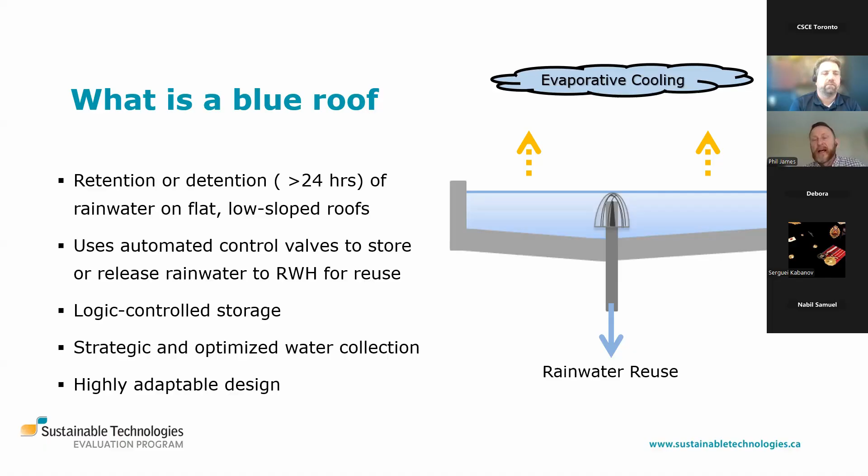Before we installed the system, once our 5,000 liter tank filled, the rest of the water bypassed and went into the storm sewer system. But with this system, we're able to keep that water on the roof and use it as we see fit. So it's a very highly adaptable design, and we're excited to share some of those results with you today.

Some high-level potential benefits of smart blue roofs that we're trying to estimate as part of this study: obviously peak flow reduction, which equates to flood reduction. What is the rainwater harvesting potential, notably for toilet flushing and irrigation? What are the evaporative cooling benefits of this type of technology when you allow that water to pond on the roof for prolonged periods during the hotter periods of the summer?

What does that mean in terms of energy savings? What does it mean in terms of water conservation, in terms of how much water we can collect and use to offset potable water? And finally, what are the utility cost savings? With stormwater charge fees, water costs, utilities, energy costs, what are those savings as a result of implementing this technology? We're going to highlight some of these benefits later on.

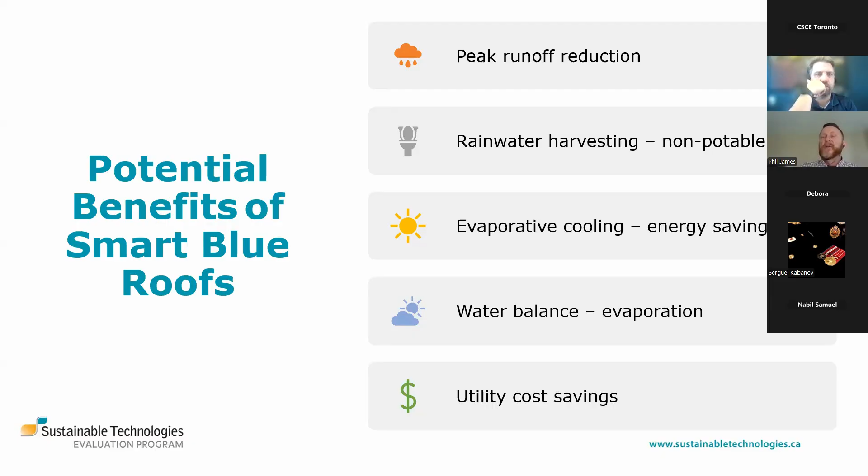First I'm going to pass it over to Kyle to talk about this Blue Roof system overview. Oh, thanks, Phil. Yeah, appreciate that.

You're looking at the head office of Credit Valley Conservation in Mississauga. We have essentially two buildings there: the building in the back, and the building in the front, which is Building A. That is where we placed our Smart Blue Roof.

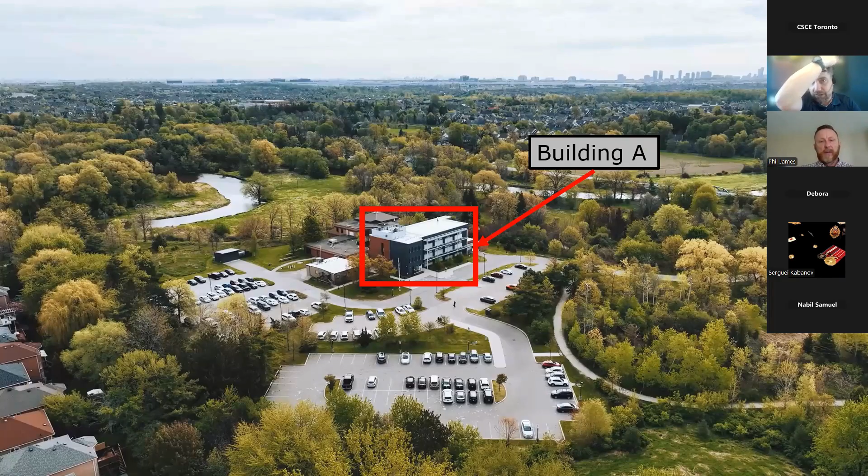You can see it's a flat roof, TPO, white TPO membrane. It was identified as the ideal location for implementing a Smart Blue Roof.

So just a closer look at Building A's rooftop. Essentially what we did is we broke our roof into two zones. Zone one is where our critical HVAC infrastructure is, where our outlet pipes are. Zone two is our blue roof zone.

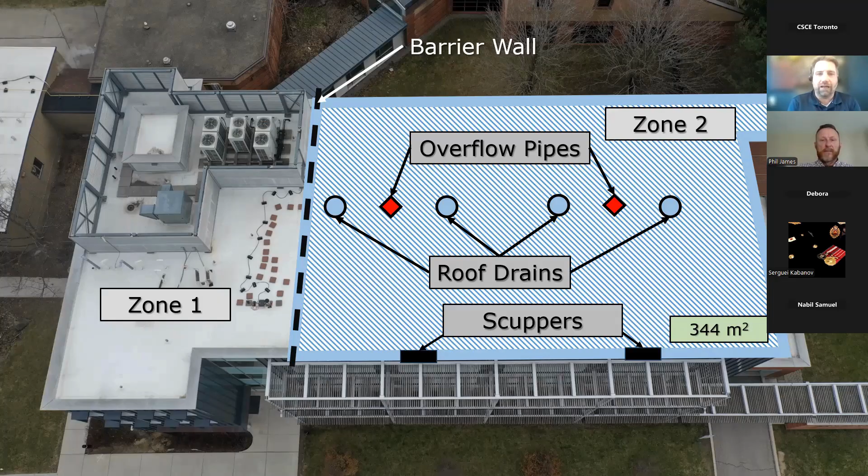Within that blue roof zone, we have 4 drains with 2 emergency overflows identified in red there. We have 2 scuppers, and the entire size of the blue roof zone is 344 meters squared. So a fairly large area that allows us to collect and store water on top of the roof.

One of the things we noted in the previous slide was a waterproof barrier wall. You can see it in the picture on the right-hand side, that barrier wall that separates zone one, protecting the critical HVAC infrastructure from water storage, and zone two on the left-hand side of that barrier wall. The picture on the left is looking out onto the blue roof zone.

There you can see our drains right there. In the picture on the left you can't really see it, but we have our monitoring infrastructure there now. Essentially this is where all of our water is being stored.

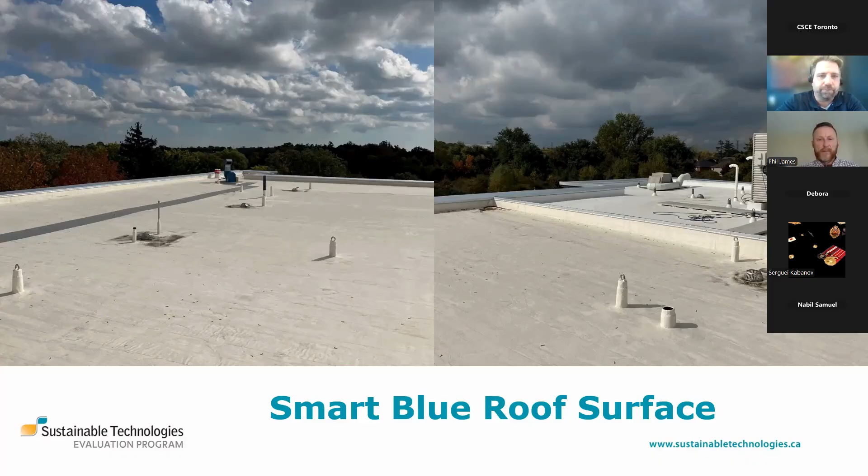One of the big considerations we had to think about was how we were going to store that water on the roof in such a way that we protect the integrity of the membrane. During construction, we originally had a TPO, white TPO membrane, and we were installing a new roof drain for our Smart Blue Roof system.

We found that underneath, once we peeled back the membrane and started getting into the insulation layers to install that new drain, the insulation layers were wet, indicating a leak in the roof membrane. That put us on a path where we had to replace the roof membrane before the blue roof became fully operational. So we had to consider our different roof membrane options as part of the design process.

We had four options: a two-ply SBS mod bit roof, a single-ply TPO roof, a single-ply PVC KEE roof, and a PMMA liquid applied roof, which is a polymethyl methacrylate acrylic resin based membrane.

So it was a liquid applied membrane. That was the identified preferred option, the PMMA liquid applied membrane, in part because it doesn't have any seams. We wanted to avoid seams because they potentially offer a weak point in the roof membrane, and because we're storing up to 25 centimeters, or 250 millimeters, of water in certain areas, that puts quite a bit of pressure on the roof membrane and could create weak points at a seam.

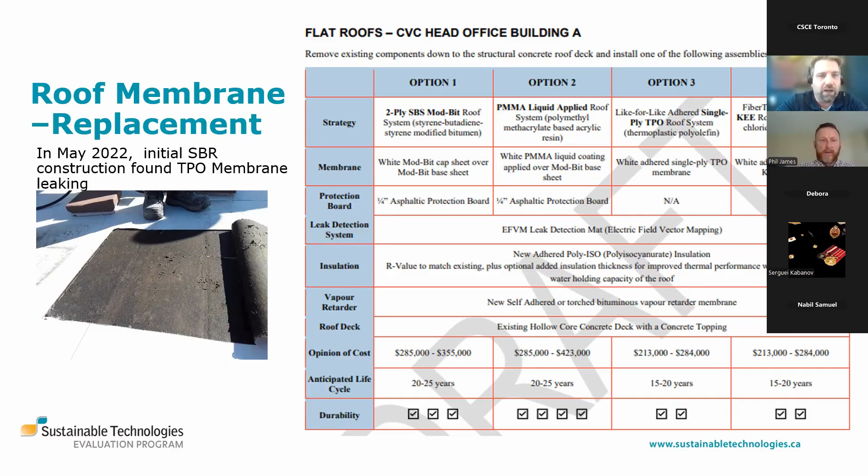We also looked at how long these roof membranes last. Option two could last up to 20 to 25 years. With option three, the TPO membrane, it only lasted to the 12-year mark. We weren't seeing leaks come through to the third floor, but it gives an indication of the lifespan of a TPO membrane, and we wanted to maximize lifespan given the conditions of storing water on that roof.

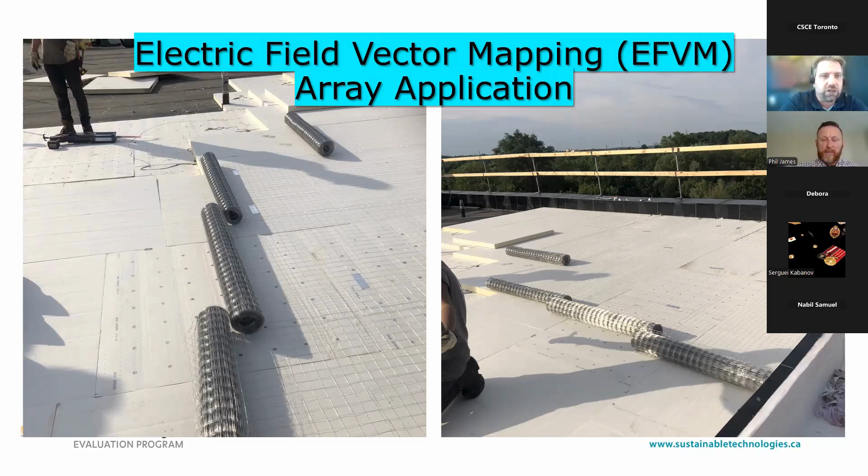Essentially, this is how the system works. We hire a company to inspect our roof membrane using the EFVM. They run a charge across the roof surface to see if that charge connects below to the steel grid. If there's a potential leak and water is getting through, that charge will come through. They're wetting the roof surface while running a low voltage charge across the membrane, and if it connects down to the steel mesh, which they're wired into, they'll read an electrical charge on their meter. If they're reading any charges, that could indicate a leak.

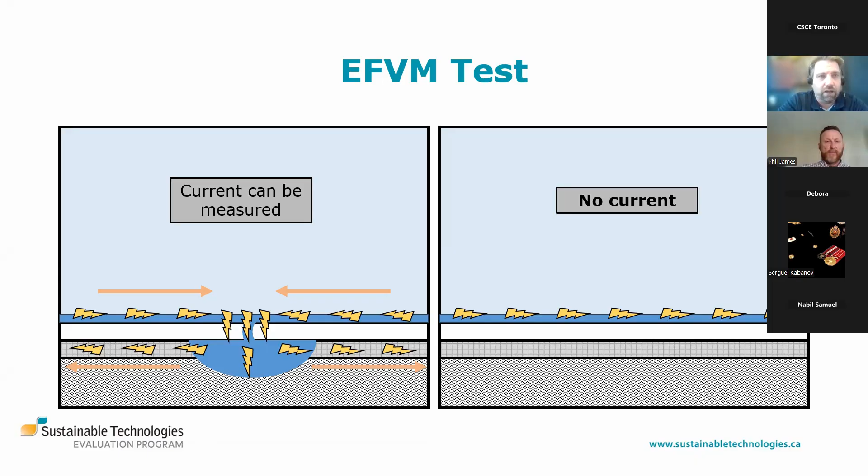Near the drains, you start seeing a charge because the water's moving down past the steel grid, but that's fine since the water's going down through the drain. If they were reading it in other areas beyond the drains, that would indicate a potential leak, and it allows us to pinpoint exactly where it is so we can reapply the PMMA liquid applied membrane, making fixes a lot quicker. We're going to run another leak detection test in November or December as part of the operations of the Smart Blue Roof.

Essentially, anytime we're storing water on the roof, because we are complying with the Ontario Building Code, which doesn't want us to have water stored for greater than 24 hours, which we are doing, and because we follow the CSA B805-18 rainwater harvesting standard, we have to mitigate our risk. So we did a water safety plan to meet that standard and address the Ontario Building Code. We had to put in a 3rd floor treatment system.

We're cycling the water between the 3rd floor treatment system and the rooftop. There's a suction line at the far drain, which pulls the water to the 3rd floor treatment system, and then pushes it onto the roof once it goes through both filters and UV light. If water is drawn into the roof, the modulating control valve opens up, and that water drains through gravity down into our basement rainwater harvesting tank, approximately 5,000 liters. Then it goes through another treatment system before being redistributed or reused to the first through 3rd floor bathrooms, where we use the water to flush the toilets.

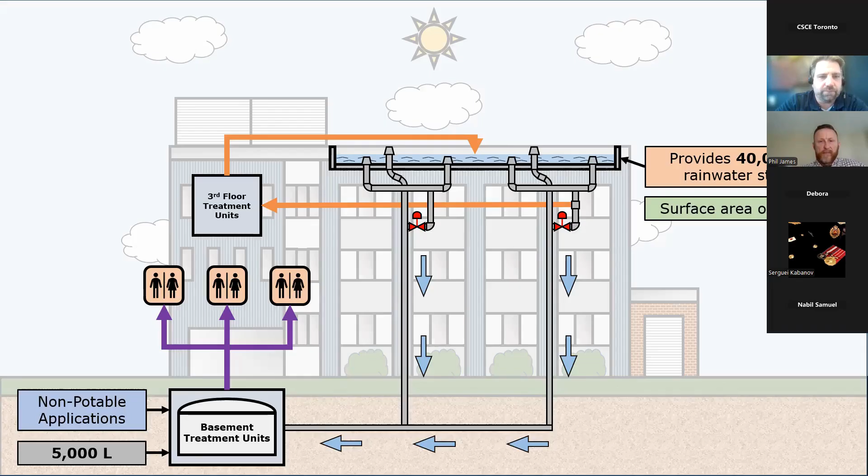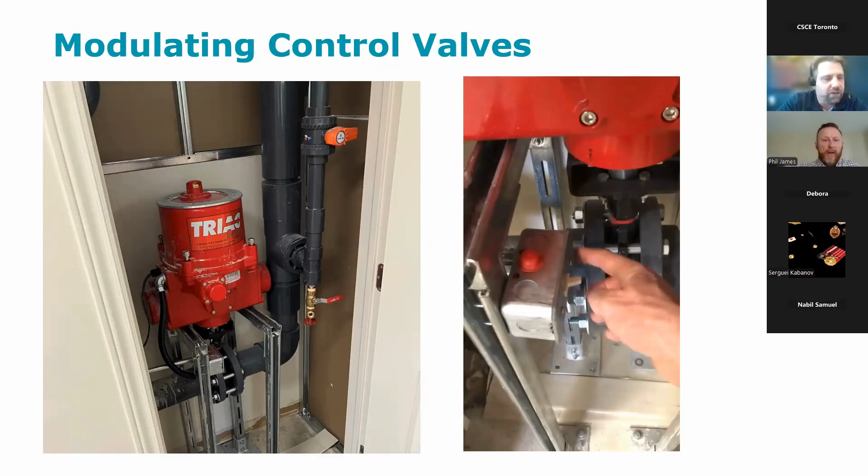We also have cleanouts. You can see there's a cleanout drain at the bottom of our suction line, and there's also another valve that allows us to open and close that suction line to do maintenance work, to clean it out, to draw the water out, etc.

We talked about adhering to the CSA rainwater harvesting standard. Our system as a whole was designed to be the first Smart Blue Roof to meet that rainwater harvesting standard. As a requirement of that, we had to do a water safety plan. Part of that plan was to understand that we're storing water on the roof, and there's a chance for bacteria to grow within that water, and what are the risks to the people that water may have contact with.

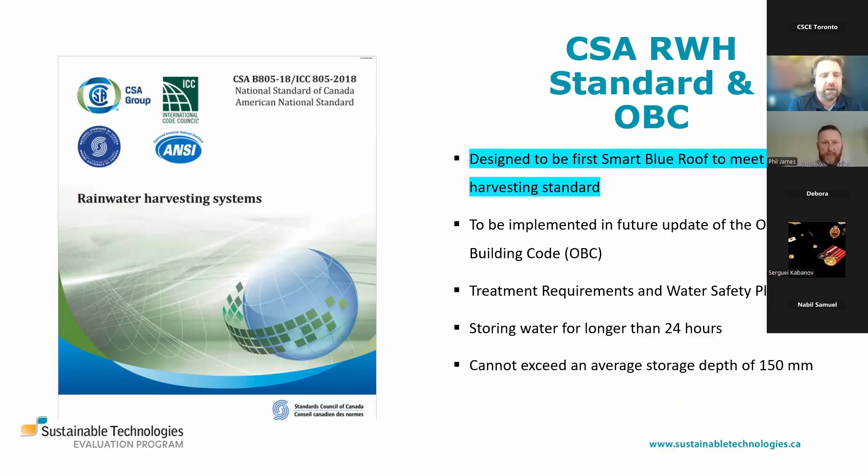Given that we are an office space, there's potential for staff to come in contact with that water through aerosols, and also through toilet flushing. So what does that mean? We have to have some kind of interventions, and that's what the CSA standard identifies: what type of interventions do you need? Is it just mechanical filter? Mechanical filter and UV light? Mechanical filter, UV light, and chemical treatment through chlorine? It lays out that standard based on the identified risk. For us, it required both mechanical filter and UV light, and I think we added chlorine on top of that as an additional cautionary procedure.

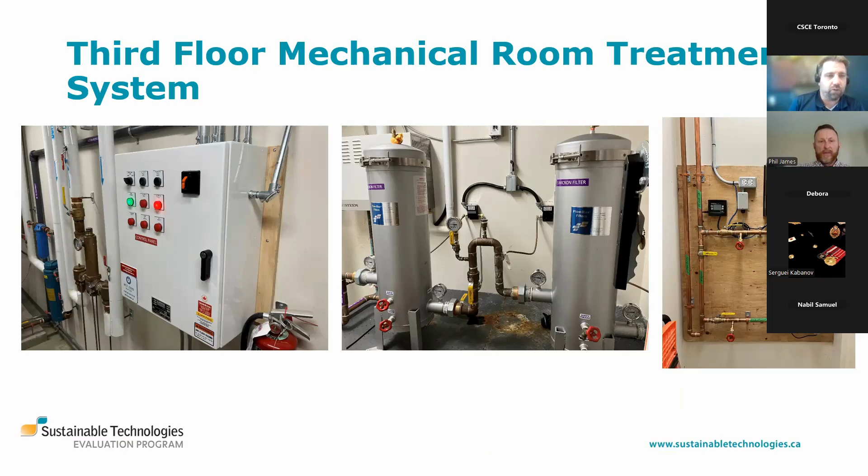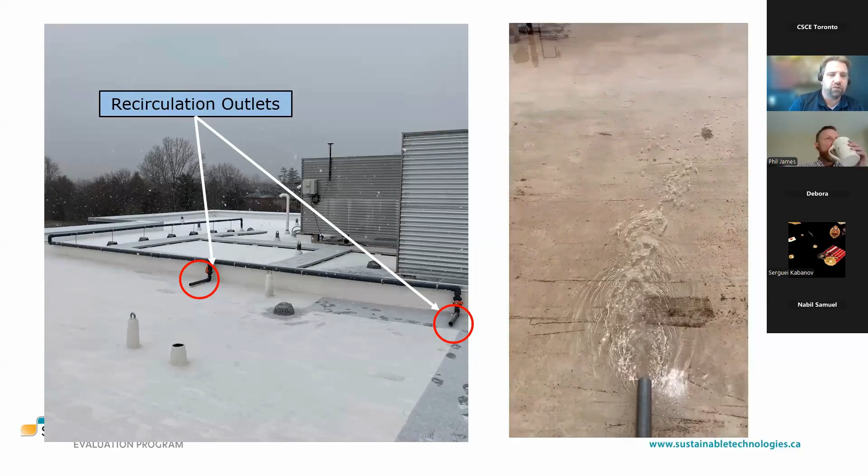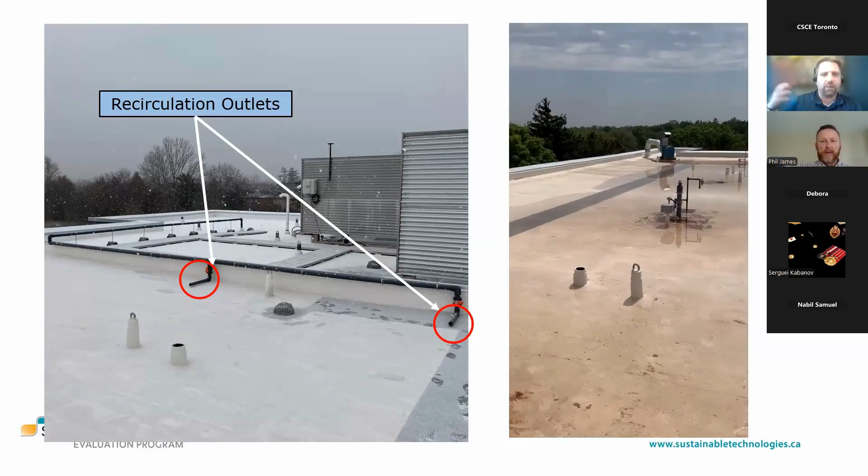So once that water is cycled through those mechanical filters and through the UV light, then that water is pumped back onto the roof. We have two outlets essentially. That's how our system moves the water from the rooftop down through the floor and then back onto the roof. We've looked at ways of improving that circulation so the water is stirred up and mixes better, and we're looking at other ways to do that as well.

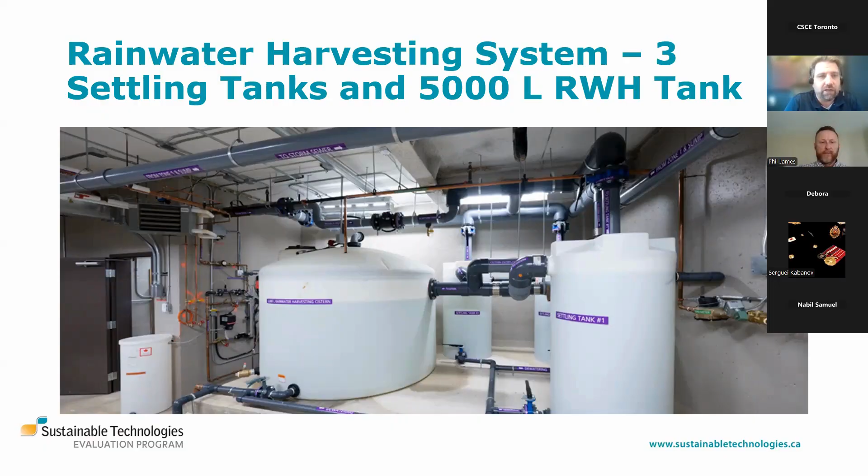It goes over top of the main rainwater harvesting tank, and then makes its way into, you can see in the picture, settling tank number 1, the tank in the front. We have 3 of those settling tanks, allowing for primary treatment so any grit, dirt, or organic matter can settle out of the water before it's moved into our main storage reservoir. Each of those settling tanks is about 1,000 liters, and our main storage reservoir is 5,000 liters.

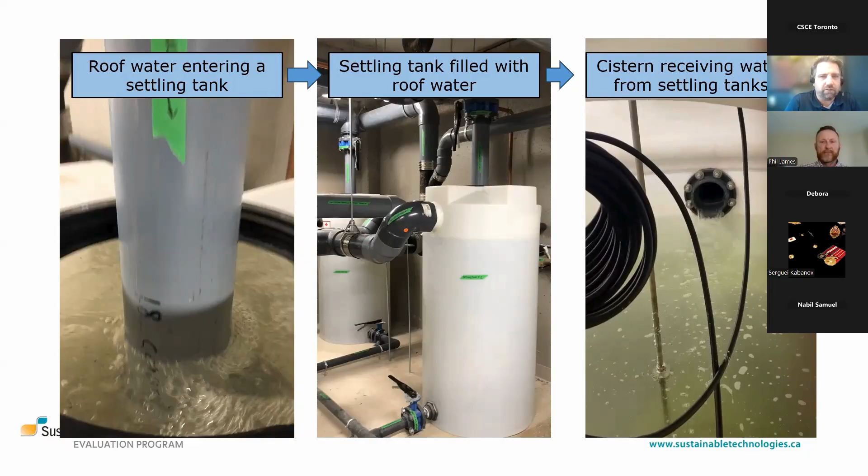So once we go from the settling tank, it goes first into a 100 micrometer Judo filter, which is a self-cleaning filter that's really handy because it does maintenance on its own to keep it clean. Then it goes through a pump system, and then through a 5 micron filter after the Judo.

Then it goes back through a UV light system, and then into an agitator. At the point of the agitator, we actually add in a chlorine solution - you can see the chlorine pump, it's a peristaltic pump that adds a certain volume of chlorine and water mix into the system as it's being agitated. Then it comes back up and out into our gray water line, which is used for flushing toilets.

One of the things we've learned here is figuring out how much to pressurize the line, because we're in the basement but have to move the water not just to the first floor, but the second and third floor. We have to have enough pressure at the toilets to make sure they flush properly, but we've had to be really cognizant of how much pressure we can put into the system.

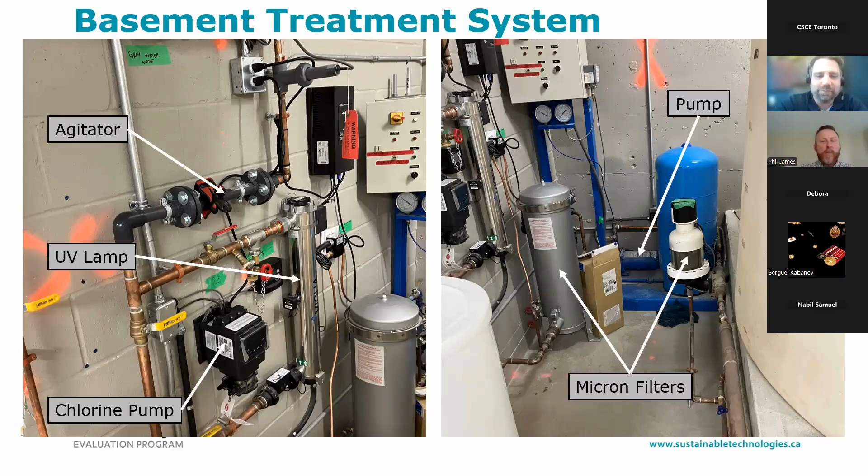Next slide. Oh yeah.

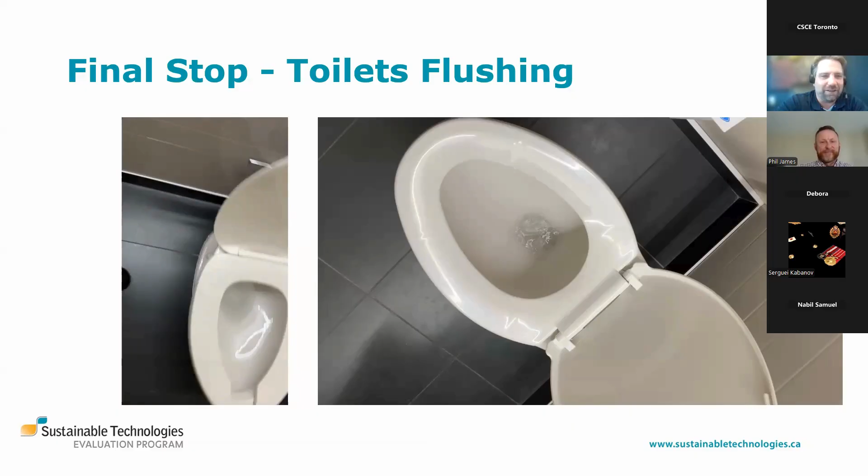So this is always a good check for us - okay, do we have enough power? It's kind of funny, I never thought this is what we'd be focusing on, but it becomes critically important in operations, because if it's not flushing properly, you're going to have issues with your colleagues.

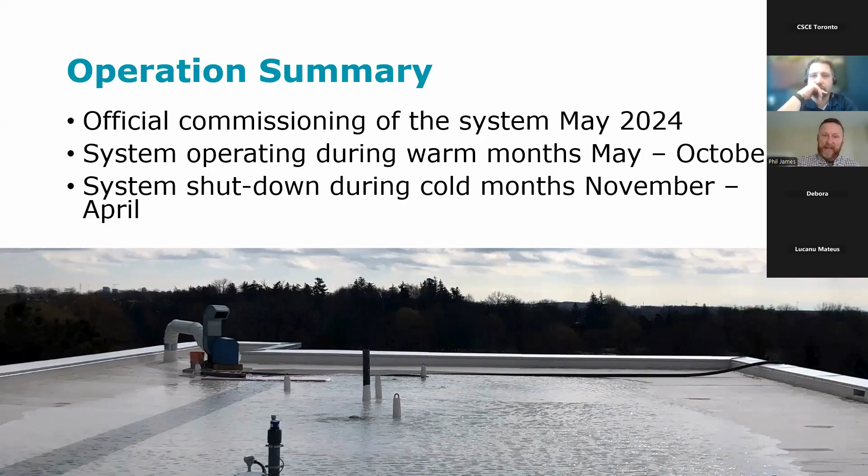From the operation perspective, we started this system in May of 2024. Per our building permit, the system operates during the warm months, May 1st to October 31st, and during the cold winter months the system is shut down. We still harvest rainwater - it moves from an active system to more of a passive system. Next slide.

So as Kyle was talking about, we have a programmable logic controller, and this is really the brains of the system. You have inputs like temperature sensors and water level sensors, and you have outputs such as controls to open and close valves, to turn pumps off and on.

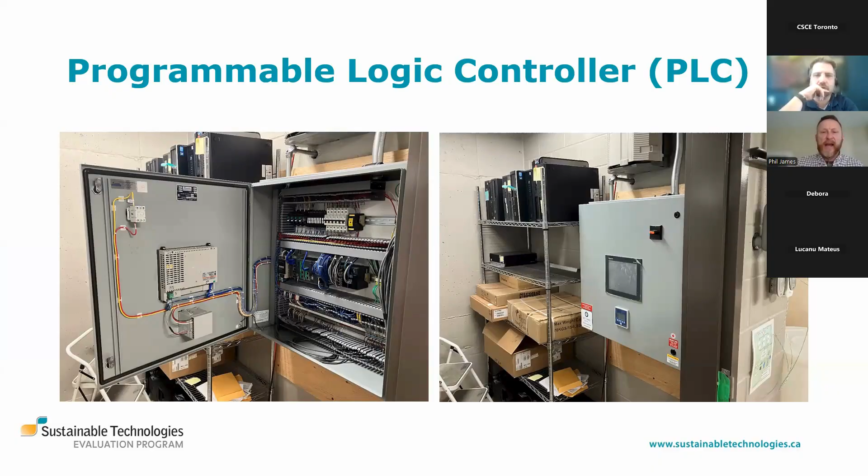If you go to the next slide, there's a schematic that shows this. The PLC, again, is the brains. The sensors on the roof that measure temperature and water level tell the PLC how much water is on the roof, how much water is in the tank, and whether we want to fill up the tank. If so, the PLC will open the valves, which gently allow that water to come down into the tank. Then the water level sensor will tell the PLC in real time, okay, I'm full, close the valves and keep the rest of the water on the roof. So that logic system is really powerful in terms of adaptable, optimized infrastructure.

Another component to this is the data, which is collected on a 5-minute time step and sent into a data sphere. From the data sphere, it's sent into a WISKI database. We can take all that data collected on a 5-minute time step and calculate key performance indicators, because trying to manage this data in Excel is impossible due to the size of the file. Working with a database like WISKI gives us the ability to manipulate and work with the data and calculate some of the key performance indicators.

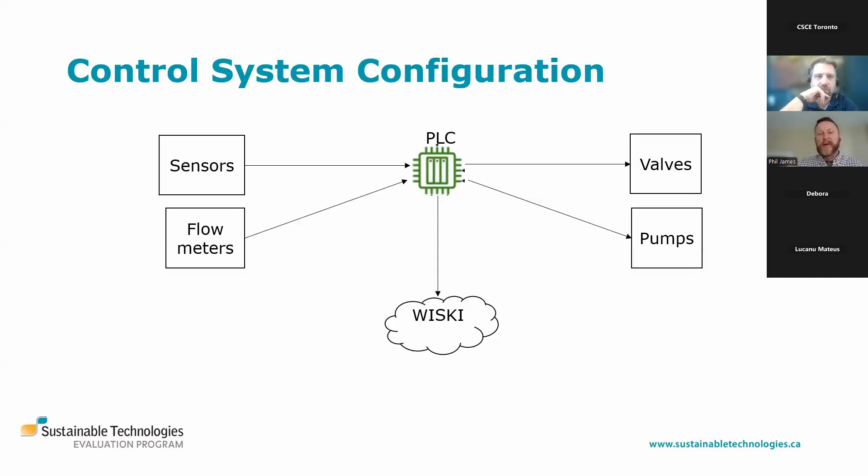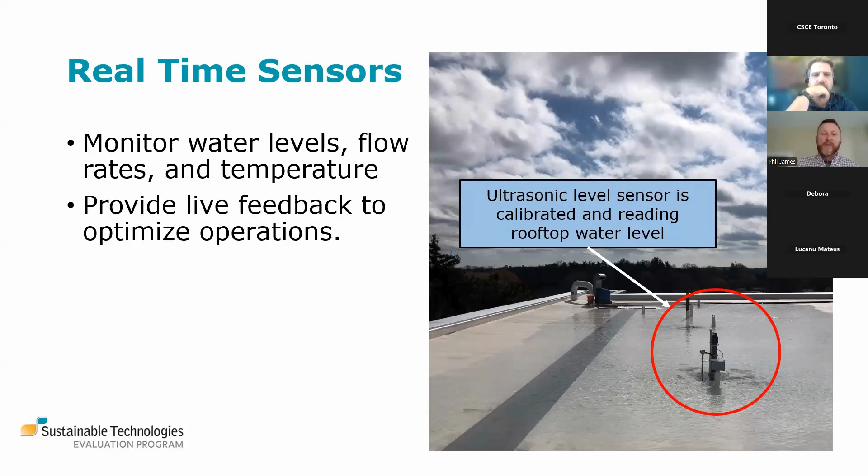Next slide. This is an example of an input, an ultrasonic level sensor that's constantly measuring water levels on the roof, water levels in the tank, and temperatures of the roof membrane, and even temperatures underneath the concrete slab core roof, to understand what the temperature differential is during different times of the day, weeks, and months.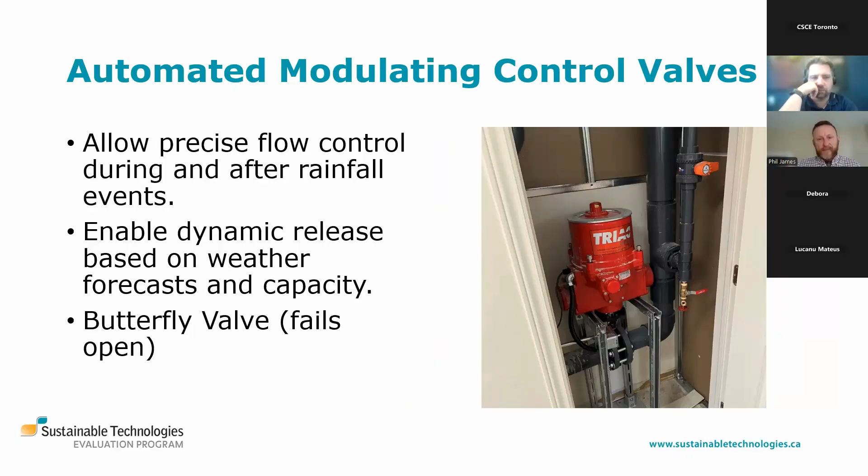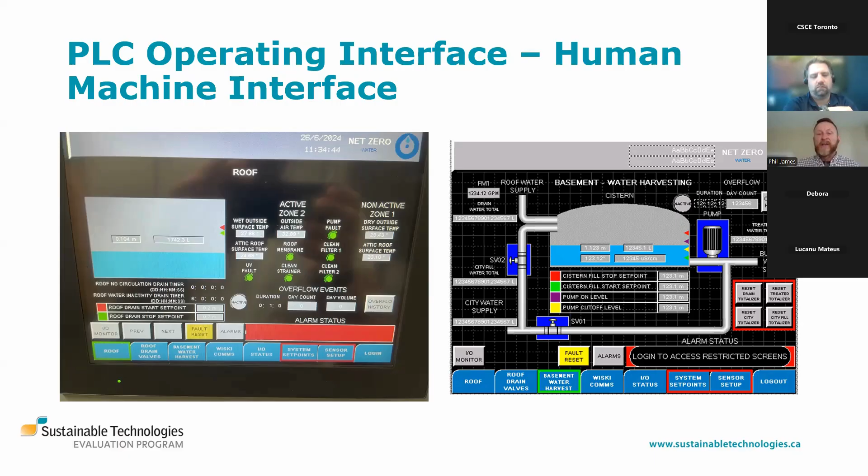Next slide. This is the human machine interface on the PLC. On the left is the roof dashboard, showing inputs like water level on the roof and other inputs such as temperature. You can see active zone 2, non active zone 1, outside air temperature, attic roof temperature. These are live dashboards showing real-time information coming into the PLC. On the right is an example of inputs and outputs, telling you what pumps are running, what valves are open and closed. The human machine interface is a great piece of equipment because it gives you a snapshot of what the system's doing, and tells you what the alerts are or things you might need to change if there are faults.

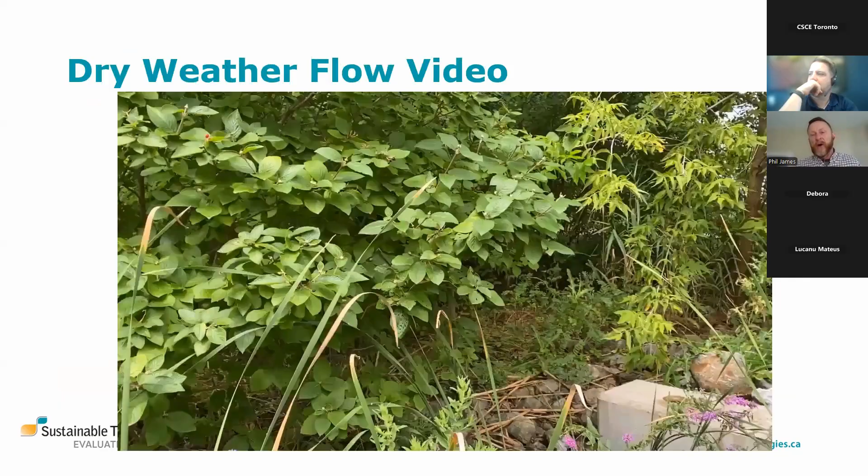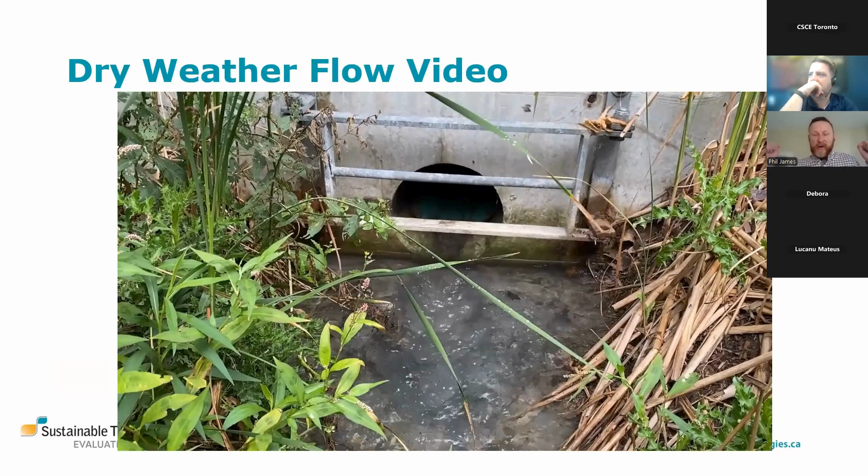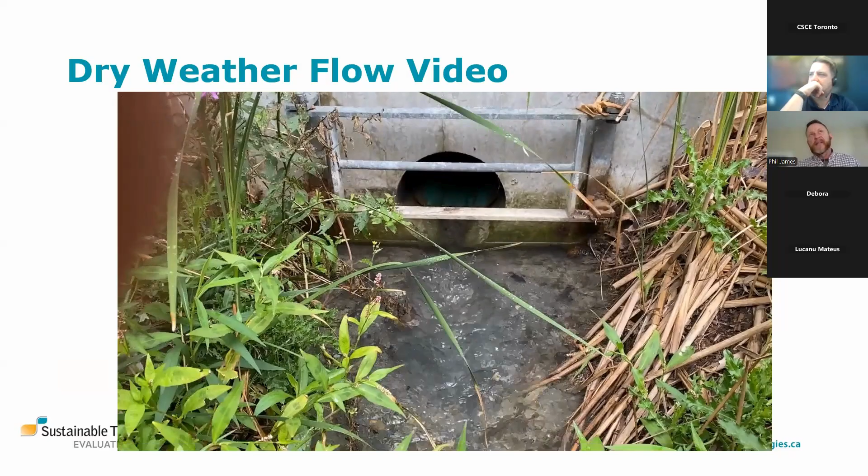Next slide. This might be the video of the dry weather release. This shows those modulating control valves when they're open, allowing water to be released as dry weather flow. Here the valves might be maybe 5 or 10% open, but you can see that gentle release of water into the storm sewer system. It's not a surge or a massive amount of water at once. We can allow it to trickle and almost replicate a base flow from a wetland. It's a really great advantage, because in some cases you can release water over a period of an hour or two, gently releasing it into the adjacent storm sewer system.

Next slide. I've already touched on cost. I think I'll move into the public health results, Kyle, since we only have 15 minutes.

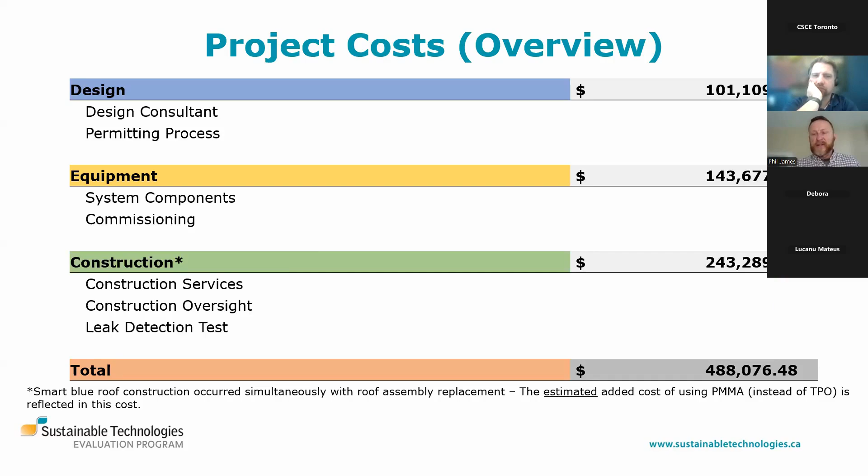Yeah, so we did conduct some public health research. There hasn't been a lot of public health research done in relation to stormwater management features. We've touched on the fringe of it, like what are the benefits of green infrastructure to general populations. With COVID, access to green space became very important. But we haven't looked at what are the bacterial levels, what is the associated risk. When you look at water quality criteria, there's the enhanced water quality treatment from MECP.

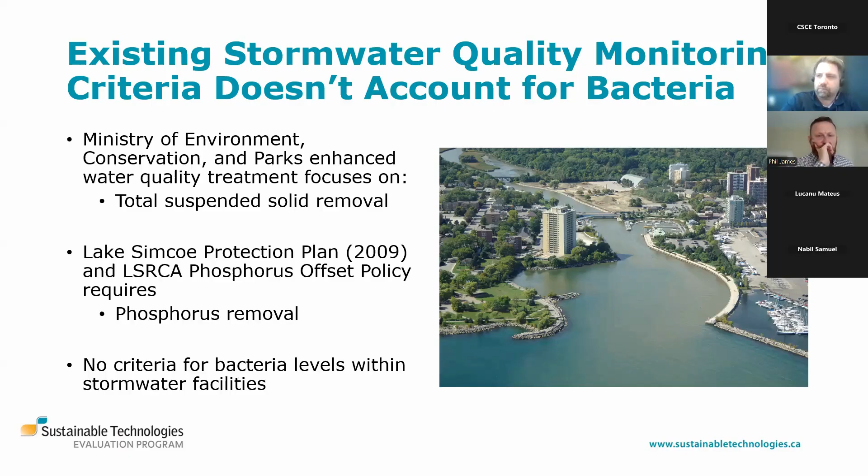So what were some of the drivers? Well, for public health monitoring, really they're unknown. For storing rooftop water, we knew bacteria would grow on the roof if we were storing water on it, but we didn't know what type of bacteria, how much, what the bacterial counts would be.

And we were one of the first smart blue roofs in Canada. There's only two known smart blue roofs, one that exists in Elmira, done by our design consultant on their own roof, and then we have ours in Mississauga.

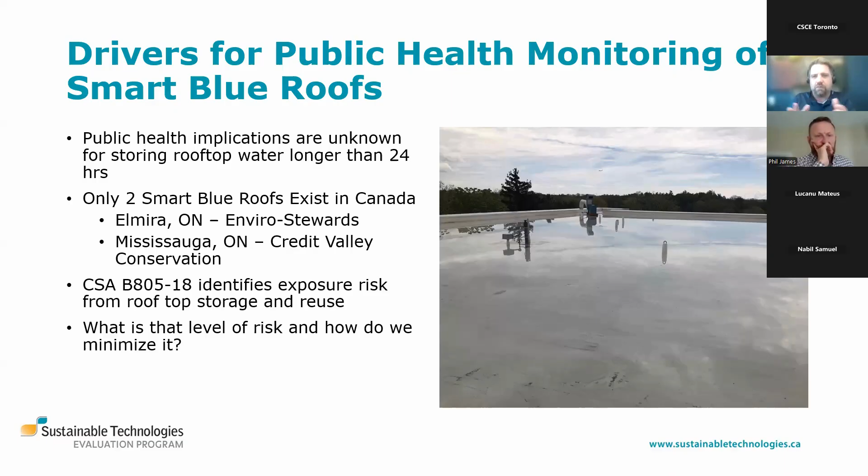And as I noted before, meeting that rainwater harvesting standard that CSA produced identifies exposure risk from rooftop storage and reuse. But what exactly is that? Are we creating some level of risk when we're just leaving water stored on the rooftop without receiving any form of treatment or intervention?

And so, as I noted before, we have a relationship with Toronto Metropolitan University. This is Dima Balaa, she is a PhD student in public health, and she put forward a design for a monitoring program that would measure bacteria levels on the rooftop.

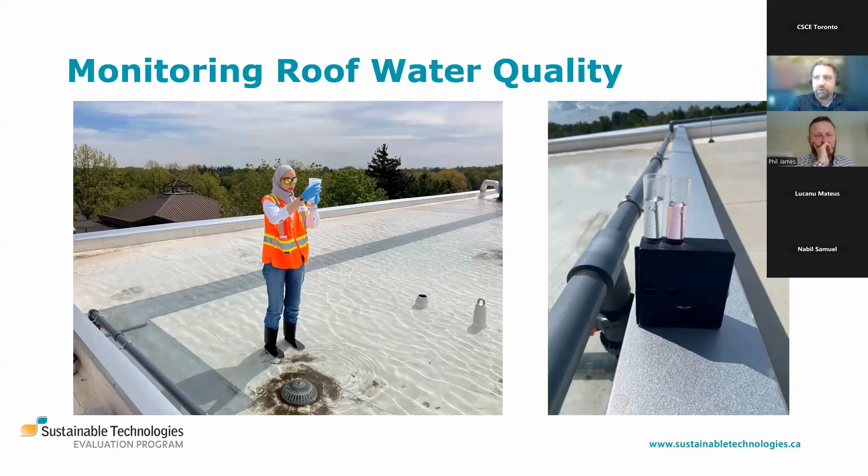The ones that we were focusing on in particular were E. coli and Legionella, and we'll also show total bacterial counts in terms of what we were seeing on top of the roof.

This was also selected based on, why did we focus on E. coli? Well, E. coli are often used for public beaches, and they also have requirements for irrigation. So we wanted to see where our levels were at and how our mitigation factors would impact fecal coliform levels.

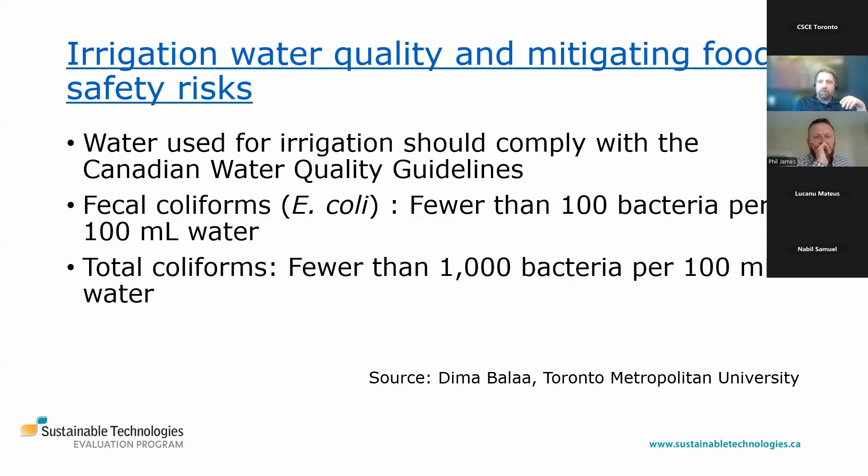So when you're thinking about irrigation, you should have fewer than 100 bacteria per 100 milliliters of water. In terms of total coliforms, you should have fewer than 1,000 bacteria per 100 milliliters of water. So there's some criteria, but it doesn't necessarily fit in terms of stormwater management.

Other things we could look at are BOD, TSS, turbidity, again E. coli, and total chlorine residual. This was particularly for toilet flushing and urinal flushing within our office space. What should our levels be?

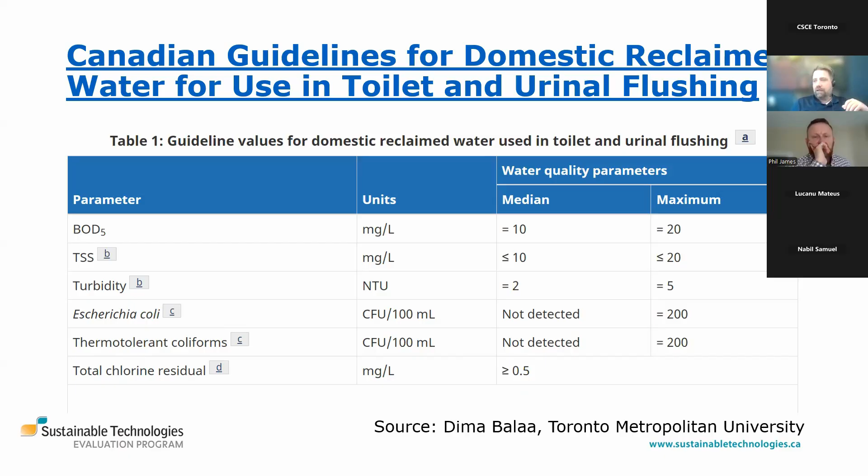So we knew that we had to have, at least for our basement treatment, a residual of 0.5 milligrams or greater, essentially, in terms of chlorine residual within our pipe system.

Legionella, again, it depends. What Dima explained to CVC and to us was the fact that Legionella is very airborne. So given that we're storing water on the roof, if we have office windows, we want to make sure we're mitigating any potential risk of those aerosols making their way into our office HVAC system.

One of the factors we also employed was redirecting the air intake. So instead of pointing towards our blue roof system, we're actually pointing in the opposite direction, and we extended our air intake about 6 to 7 feet so that it's on the very opposite end of our rooftop, in zone 1.

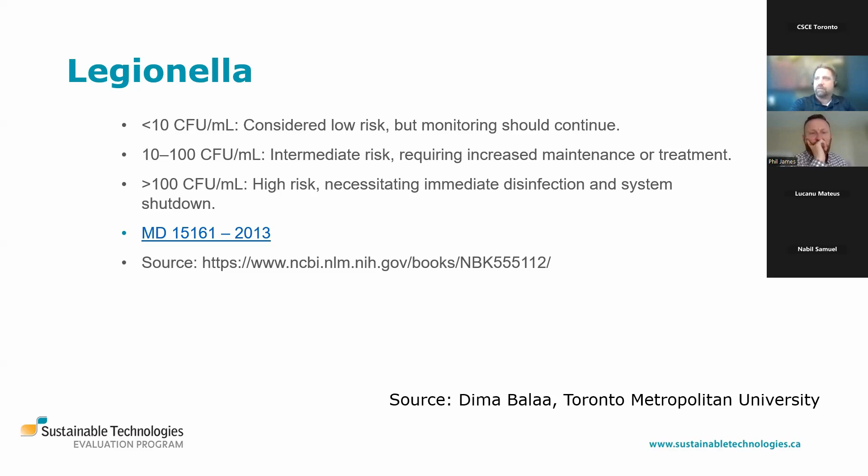You can see at what levels correspond to a certain degree of risk, and also in terms of disinfection of any system. So when we looked at water quality for the smart blue roof, this was a composite sample, and we were looking at total bacteria levels, with samples done in both 2024 and 2025.

We kind of struggled with getting on top of our chlorine. We were applying liquid chlorine in 2024, and then switched to solid chlorine pucks for 2025. I think it was calcium hypochlorite that we were using for the pucks, and these were long-lasting pucks that had a residual, a staying power, that we weren't experiencing with liquid chlorine. We used essentially pool floats, so we ended up managing our blue roof more and more like a pool, using equipment you could buy for a pool.

You can see in red, this is our bacterial count, our total bacteria count. We're looking at 23,100 total bacteria count, and the reason it was so high is because we had a chlorine residual of 0.13. This was at the beginning of July, right after July 1st, and staff were off that day, which corresponded to a high bacterial count early in the morning.

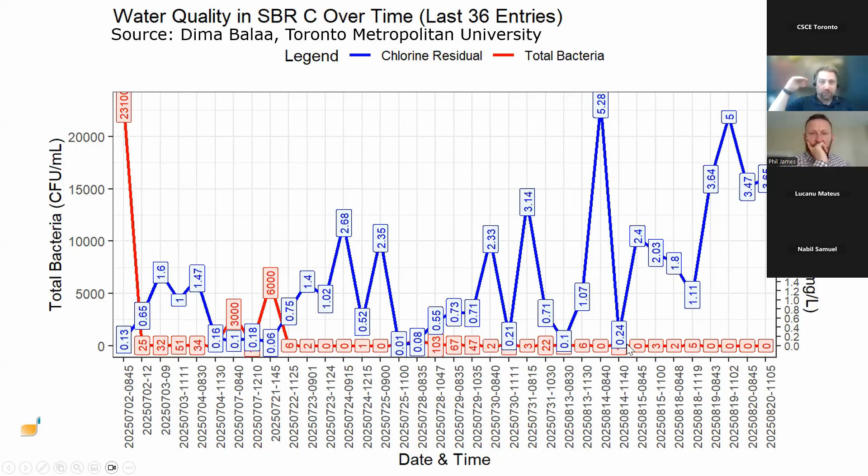Again, it got a little bit low probably over the weekend, maybe a holiday weekend, and our bacteria counts got up to 6,000, then it slowly dissipated, so by pretty much the end of the year we were all around 5 or less. Six was the highest number, and that was from August 13th to essentially August 20th, that last week of sampling. So we know as long as we keep our chlorine residual up, we can really control our bacterial count.

This rang true also for E. coli. You can see our counts getting high, and this E. coli can be generated from any kind of debris, organic matter, bird droppings, etc., starting to create that environment. But you can see that as we got earlier in the year, when we were at 0.03, 0.04, that's when we have these spikes. But as soon as we start getting more consistent with our chlorine levels, as you can see in the latter half, our E. coli drops down to 0, minimal amounts. We were using 1,000 CFUs per 100 mils as our criteria.

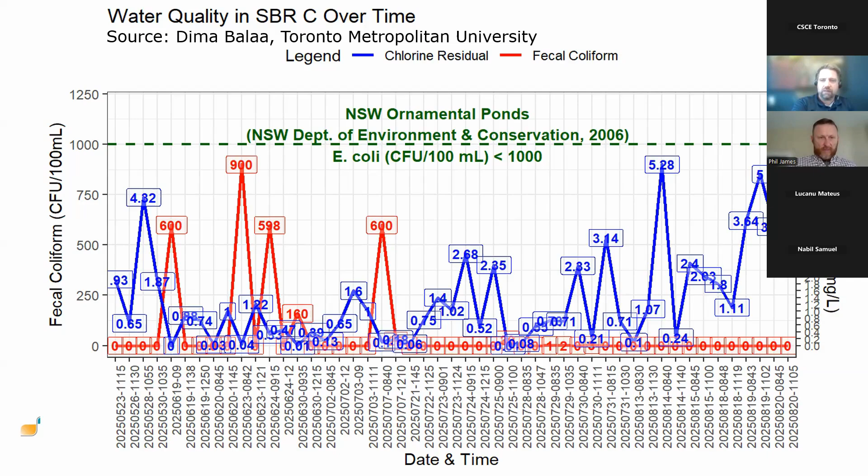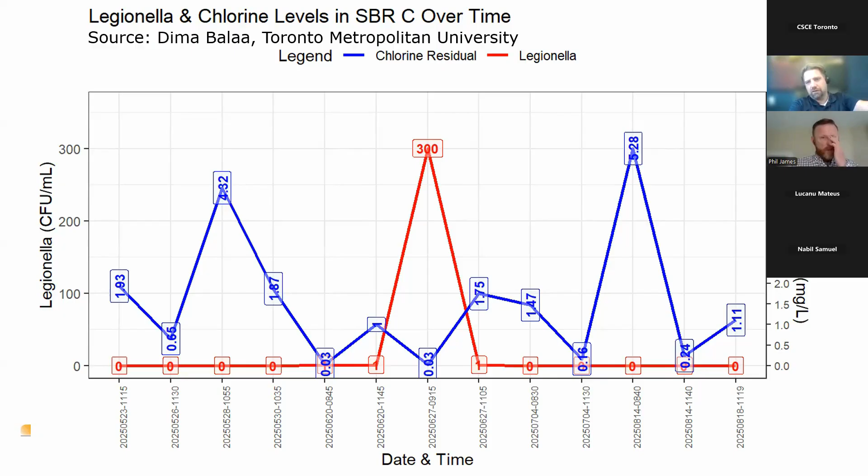So we never exceeded it. We got better and better as the summer progressed, and found chlorine to be an effective intervention in keeping E. coli levels down, if not 0. With Legionella, the same thing, it got a little bit high here, but that was when chlorine was particularly low. As chlorine levels came up, the bacterial counts came down and were minimized to 0. Again, that falls in line with what we saw with total bacteria, with E. coli, and also with Legionella.

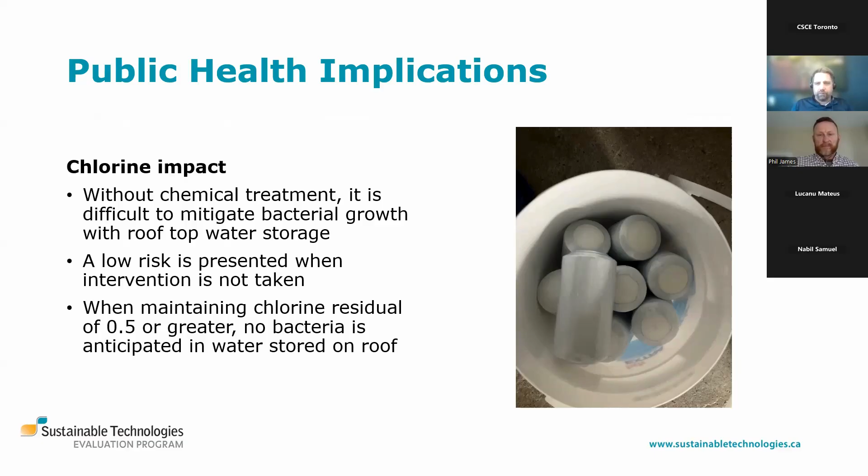So just the impact—without chemical treatment, it is difficult to mitigate bacterial growth with rooftop water storage. Even when running it through mechanical filters, they can cut down the amount of organic matter within the water that creates those conditions for bacteria. You can run it through UV light and it does help, but it's like pouring water into chicken soup. Once bacteria is established on the blue roof, it doesn't matter if you run it through the filter or UV light—it may help a little, but it's going back into an environment that is bacterially rich. Chlorine does the job of killing the bacteria on the rooftop so that when you filter it or bring it through UV light, it's not going back into dirty water. That's what we really found helpful—chlorine had a huge impact on managing our bacteria levels and mitigating any public health risks from blue roof systems.

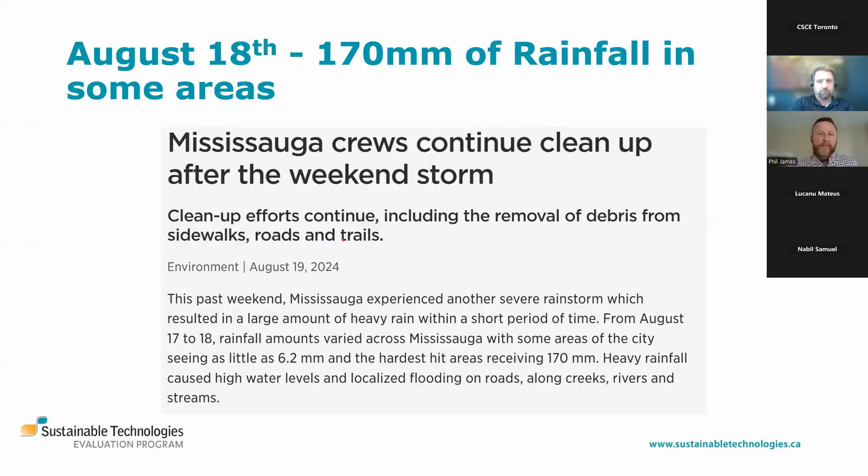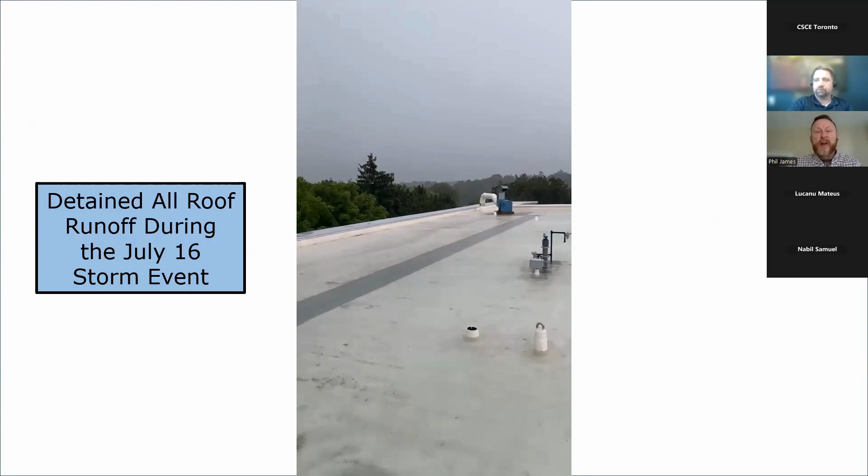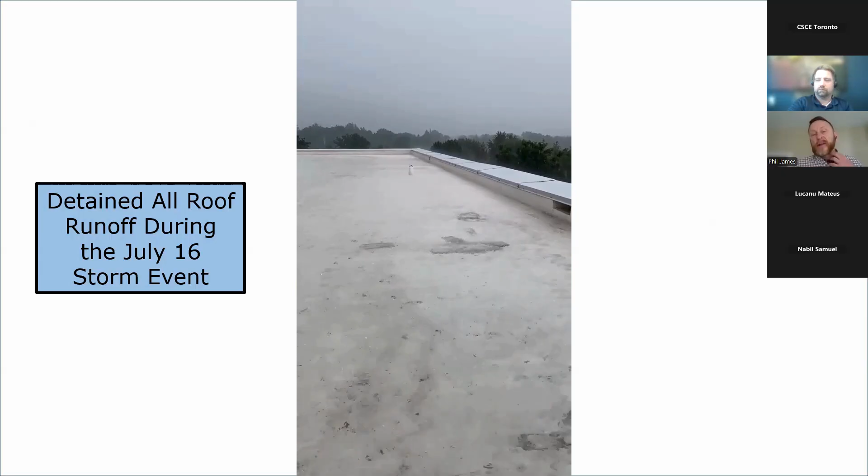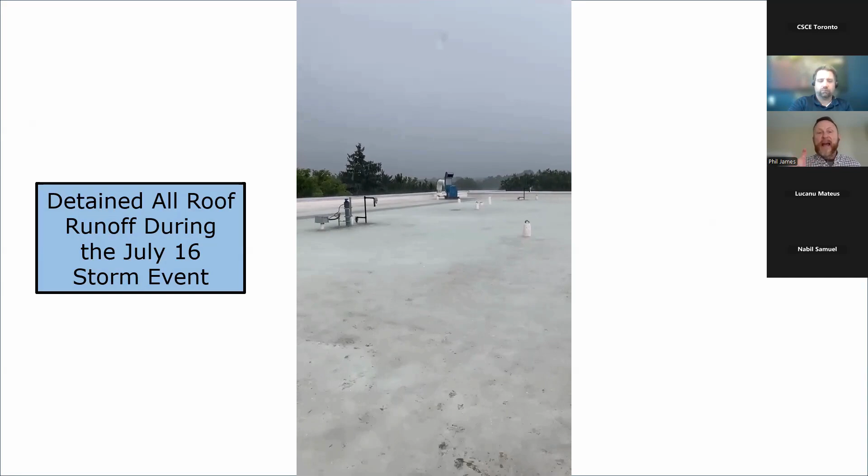On July 8th, we had Hurricane Beryl come through, and we captured that amount. Then on July 16th, we had another deluge of rain that we were able to stack, catching one storm and then stacking another storm on top. What this tells us is that for these extreme rainfall events, we're able to capture every drop of water and not release anything. With the July 8th and July 16th storm events, we captured the water and still had freeboard for more. It just goes to show how much capacity these flat roofs have. When you factor in the structural capacity of them, they can hold a lot of water.

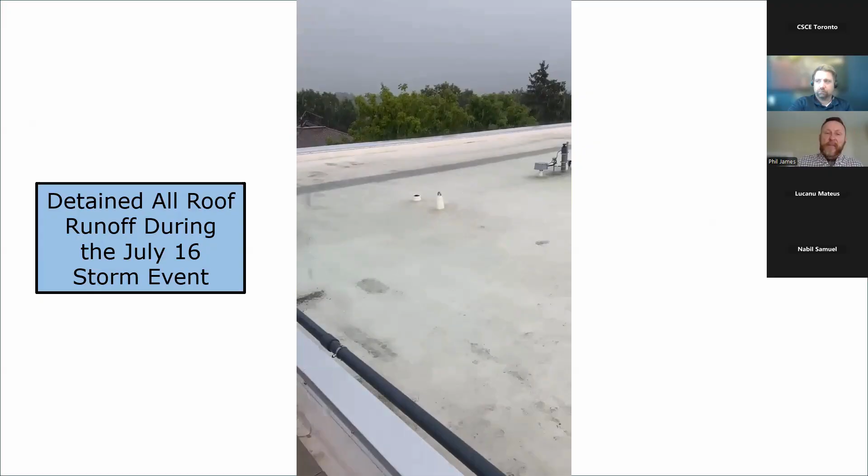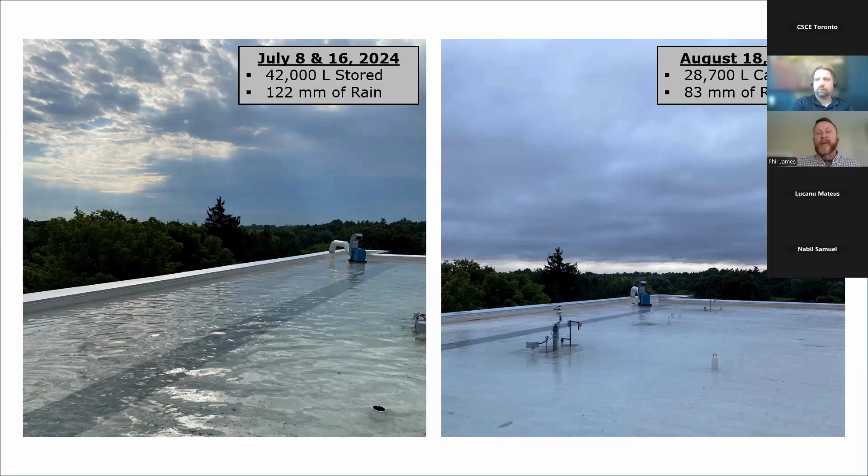If you go to the next slide, it summarizes the two: July 8th and July 16th combined had 122 millimeters of rain, we captured all of it. On August 18th, we captured another 83 millimeters of rain, all of it. That's 100% peak flow control. When you think about municipalities, there's not a lot of space in the public realm to store or capture water, so it shows how private side infrastructure could play a really important role in managing stormwater. When I showed those images earlier of all those flat roofs, that is a major untapped flood control infrastructure with real potential to make a significant impact on downstream drainage.

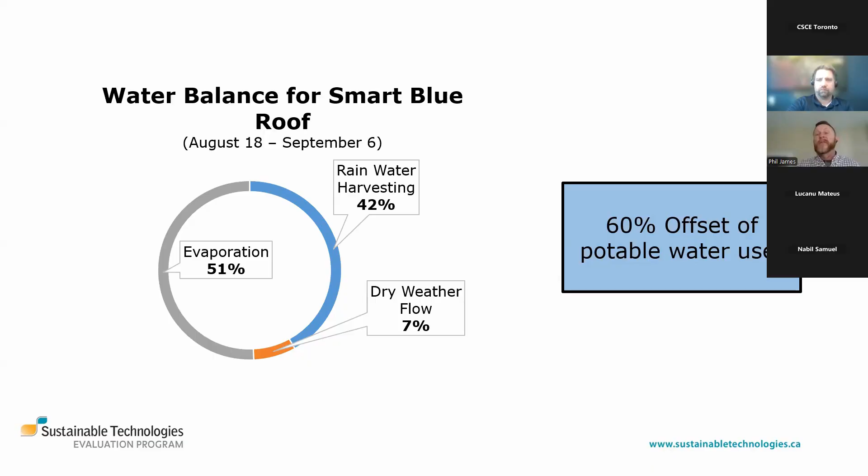This is just, I mentioned this already in the Q&A period, but over a certain length of time, August 18th to September 6th, we saw that we were able to lose 50% of the volume to evaporation, 42% was harvested for flushing toilets, and we just had a minimal amount released as dry weather flow. Up until yesterday, looking at the total amount of water used to flush toilets, and the fraction used based on potable water versus the rainwater harvesting amount, we've got about a 60% offset of potable water use, which is quite remarkable. That's during the operating season of the Blue Roof; when it's off during colder periods it's more of a passive system. But it's exceeded our performance - we were hoping for 40%, and we've achieved 60%.

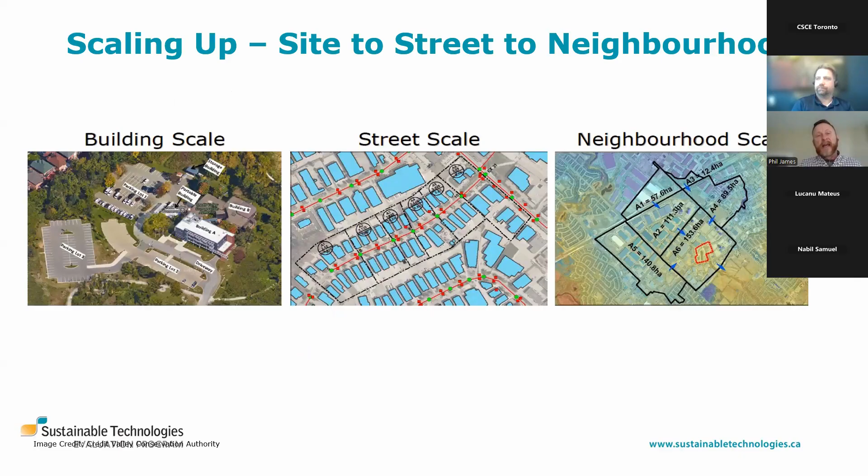As I mentioned in the Q&A period, we're thinking about how do we scale this up from the site scale to the street scale to the neighborhood scale, and what kind of impacts can we have. Going to the next slide takes us to the street scale - this is a neighborhood in Mississauga where we looked at building footprints very similar to the building footprints at our head office.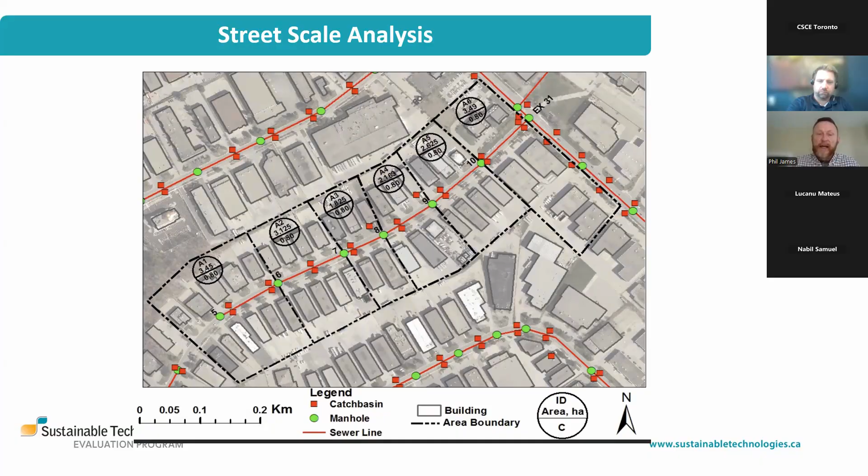This system has a storm sewer that was built in the early 1980s, designed to convey the 10-year storm event based on a runoff coefficient of 0.6. The current impervious surface today is about 0.8, meaning that storm sewer system is undersized for the 10-year storm. It's only 40 years old, but it's already no longer providing the level of service it was originally designed to do. So the municipality has a decision: do we upsize the pipe, or could we retrofit that street with blue roofs? That way you could get a sense of whether the option is to upsize the storm pipe, or maybe retrofit and restore the capacity of the pipe and extend its useful life - really looking at the life cycle of the infrastructure.

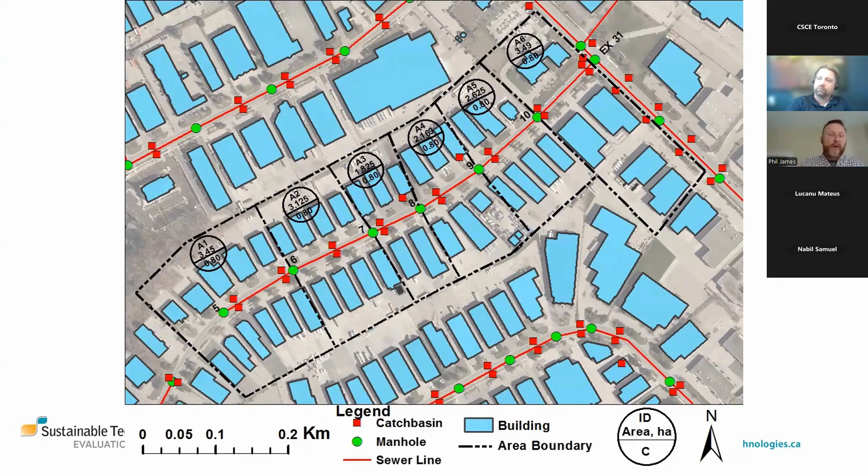So if you go to the next slide, we created this animation that kind of explains it. There's the design flow for the 10-year storm based on conditions in the early 80s.

The next flow is current conditions based on current imperviousness, because we know imperviousness often grows. Areas, parking lots get expanded, or additions get added on, so the imperviousness of the catchment increased significantly from when it was first designed in the early 80s.

Then we looked at, okay, if we took all those flat roofs and put on blue roofs based on the performance we measured at our head office, we could actually throttle the flow back to 2.58 cubic meters per second and get restored capacity. By doing that, we extended the lifespan of our pipe by 40 to 50 years, if not longer.

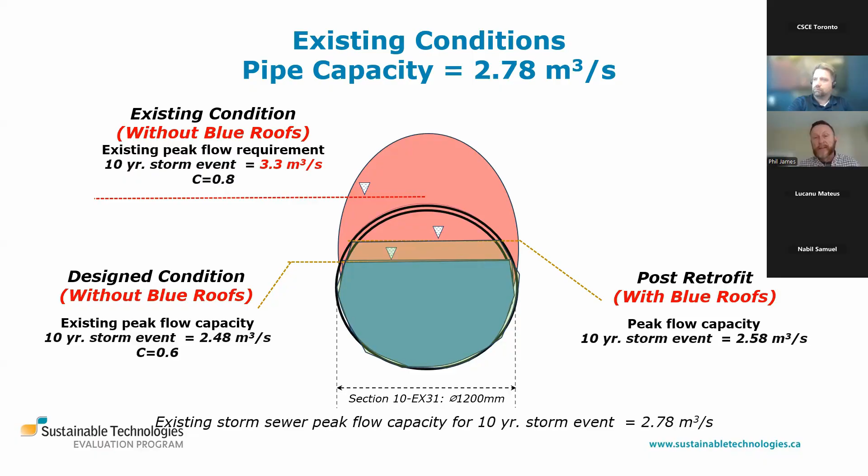Then we also looked at climate change. If we factored in climate change, it's slightly surcharged, but it still provides that infrastructure resilience to future extreme storm events. So from a performance, a technical performance perspective, at a street level, it performs very well.

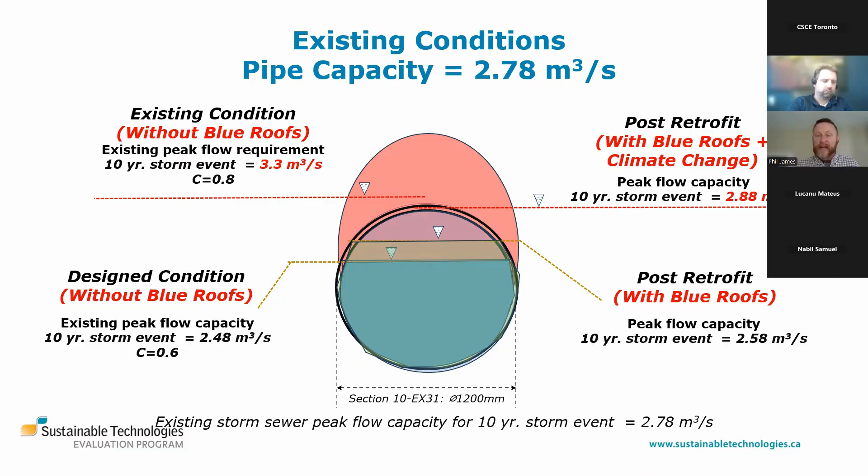Now let's look at the neighborhood scale. We developed a PCSWMM model for the headwaters of the Cooksville watershed, and we took that model and modified it to see what it would look like if we added blue roofs across that catchment.

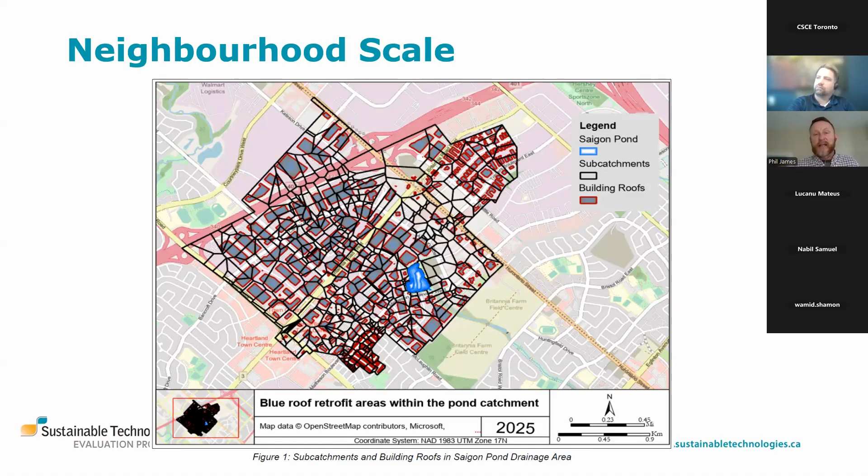So if you go to the next slide, it gives you a visual of that same catchment. What would it look like if we took all those roofs and stored different volumes, or different water depths, on the surface? What would it mean to the downstream end of the drainage system?

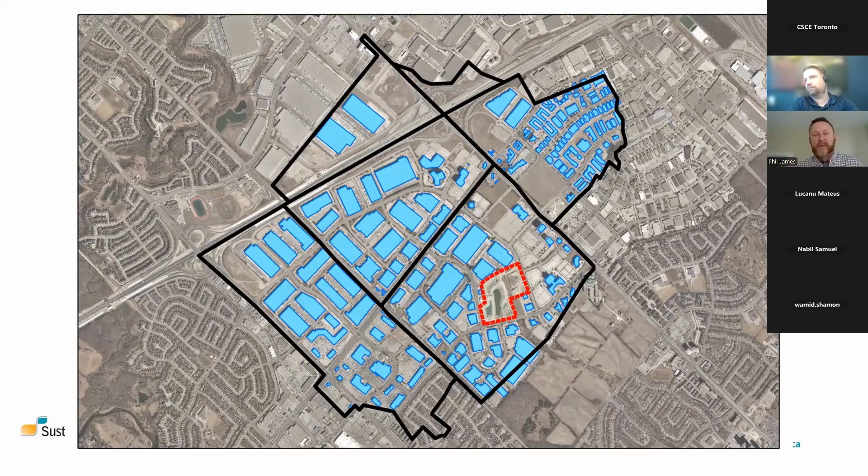The first slide shows existing conditions. On July 16th, here's what we saw on one of the roads at the bottom of that catchment area. The major system was active, the full right-of-way was flooded, and you can see there's a car stranded in the middle of the water there.

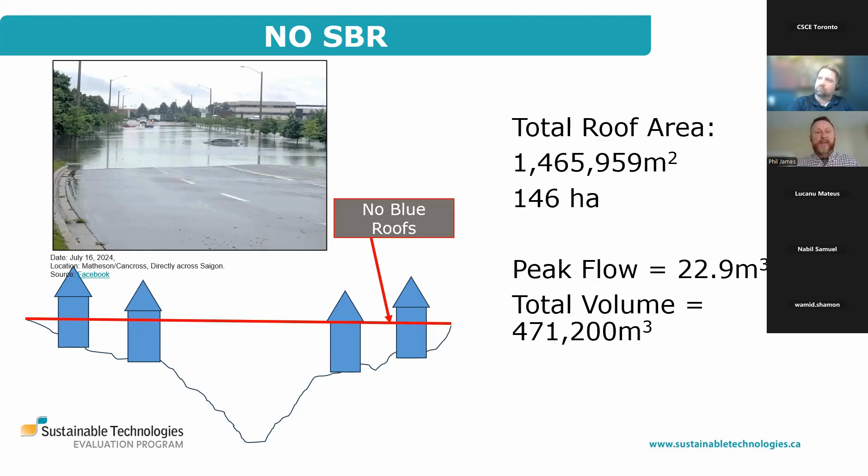What we wanted to understand was how our conditions would improve as we stored incremental amounts of water on those flat roofs I showed in the previous slide. If we go to the next slide, just capturing 50 millimeters resulted in a peak flow reduction of about 14% and a total volume reduction of 15%.

To conceptualize what that would mean, that's almost 30 Olympic-sized swimming pools. That would take that water out of the system and potentially lower those floodwaters that we saw on Matheson Boulevard, as well as floodwaters downstream of this catchment.

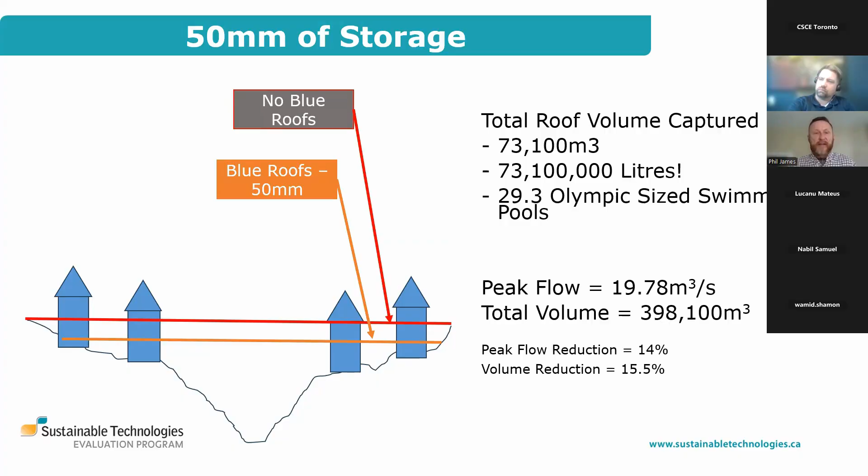If you go to the next slide, 119 millimeters. Now, we know we could store more than 119 millimeters, but the 100-year storm rainfall depth is only 119 millimeters, so you can't store more than what actually falls. But here we were able to capture 64 Olympic-sized swimming pools, and we had almost a 35% reduction in volume.

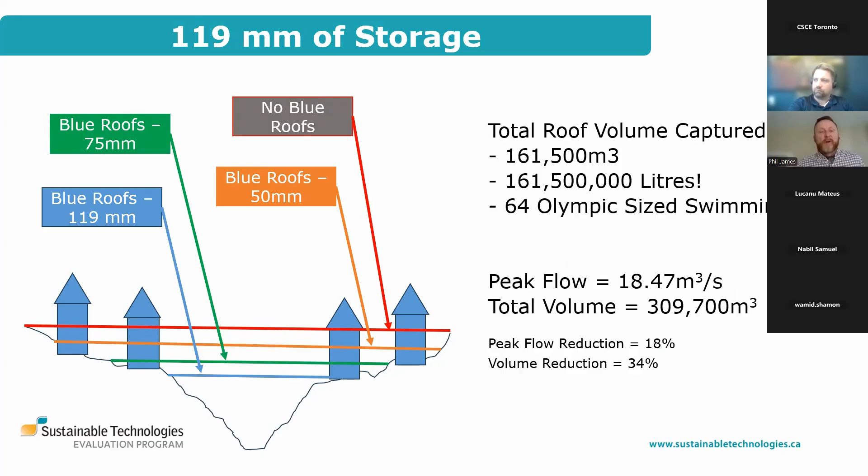So what we're going to be looking at next year is taking the outputs of this PCSWMM model and actually trying to compute what the reduction in flood lines or water levels would look like in this particular area and downstream, and what that would mean in terms of damage reductions, whether flooded buildings or erosion damage to infrastructure. It's a very difficult thing to calculate, but we're going to give it a shot.

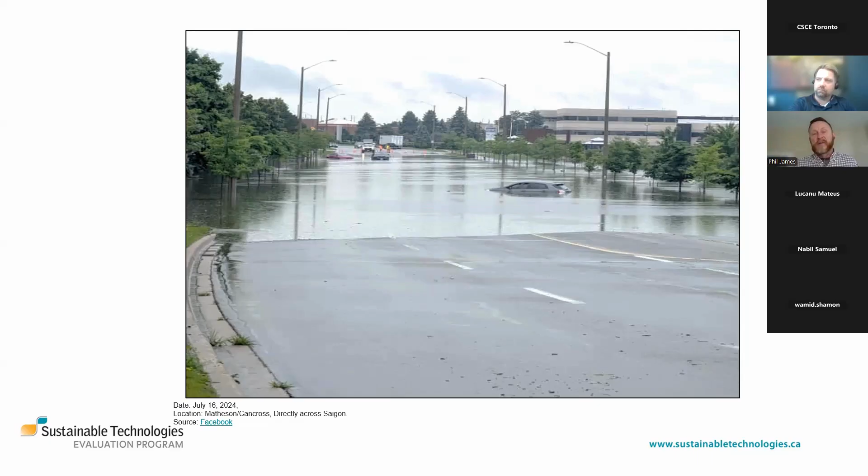But we're very data rich now. We've got really great data at the site scale, and we can now scale it up to the neighborhood scale. We've got some really great tools at our disposal, such as the risk and return on investment tool, so stay tuned as we work through those numbers.

And then finally, I'll end it with tours. I know this was a virtual session, but we always welcome people from the industry who want to learn more about this technology, where we can bring you in and show you the roof. We can show you the modulating control valves, and bring you down to the basement to show you where all the infrastructure is and how it works.